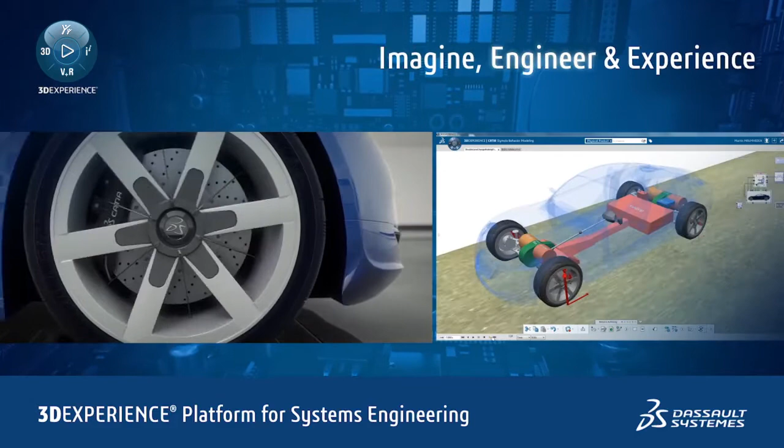The platform delivers an integrated, model-based systems engineering environment to imagine, engineer, and experience high-fidelity digital replicas that accurately predict the product or system's behavior through 3DEXPERIENCE, just like in real life. But why do we want to put 3DEXPERIENCE at the heart of the system development process?

Because in many industries, up to 80% of product innovations come from embedded systems. These systems can account for up to 20 to 40% of a product's development costs. And yet for more than 60% of the development time, no real prototypes exist. And even when they do exist, they are costly to produce and often incorrectly defined and are utilized in a suboptimum way.

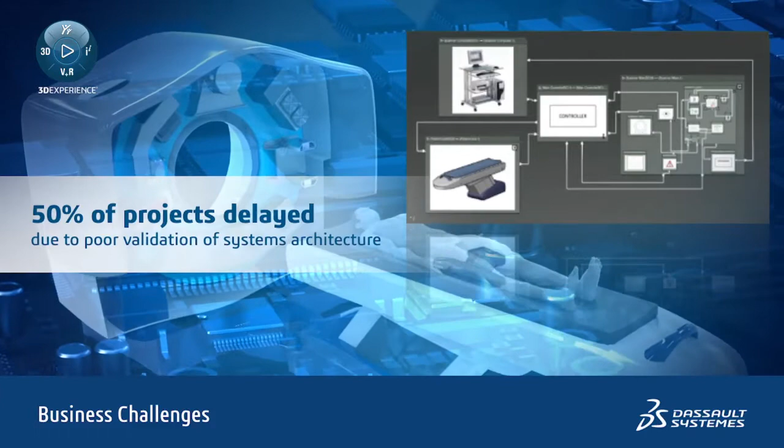Less than 10% of systems engineers typically get validation time with these prototypes, resulting in the late discovery of system errors. Errors that are often caused by systems architecture choices not being validated until late in the design process, resulting in system elements not behaving as expected when they are integrated with other systems in the overall product. This complexity, when coupled with the ever-increasing requirement to comply with stringent regulatory and industry standards, results in more than 50% of projects being delivered late or even failing altogether through poor management and traceability of system requirements.

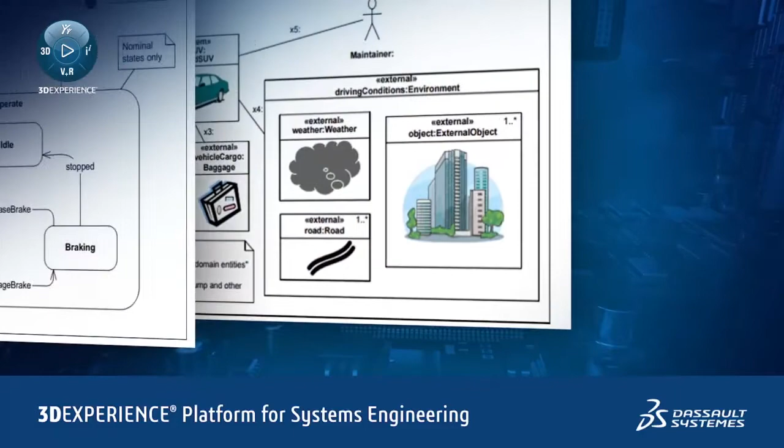These problems are caused by engineers using a multitude of disconnected systems engineering tools that can create thousands of different models of the system being developed, with each tool having its own view or model of the system. But these individual models are largely disconnected from each other as they are authored and managed by different legacy and proprietary tools. This makes it difficult to build a complete and consistent system view that integrates multiple engineering disciplines.

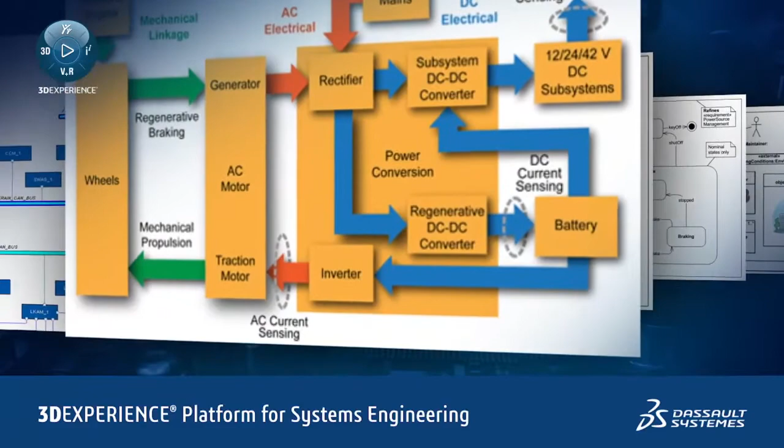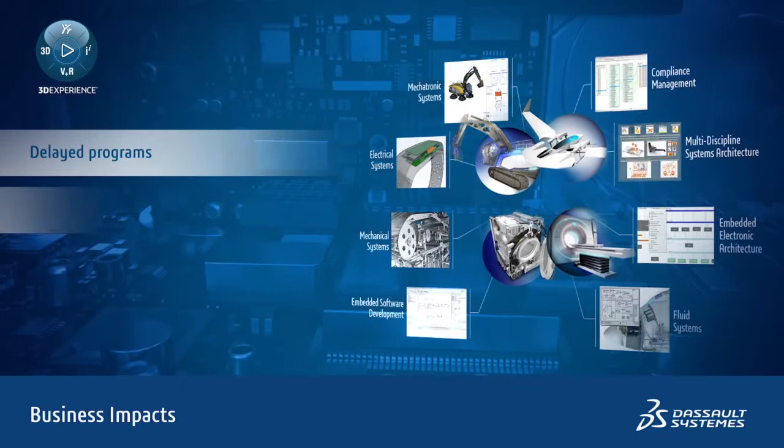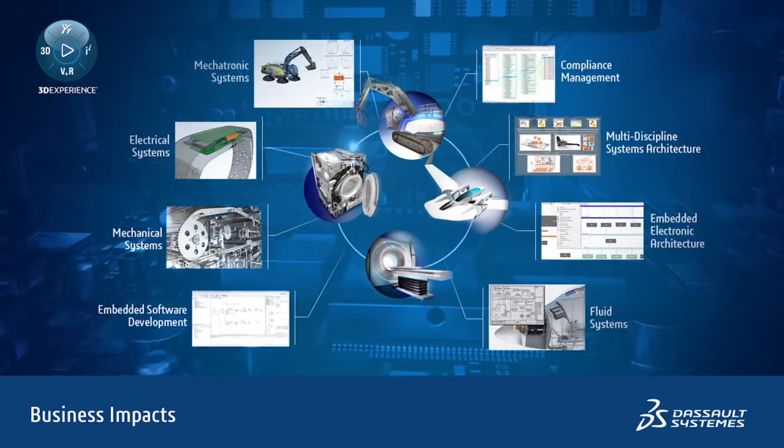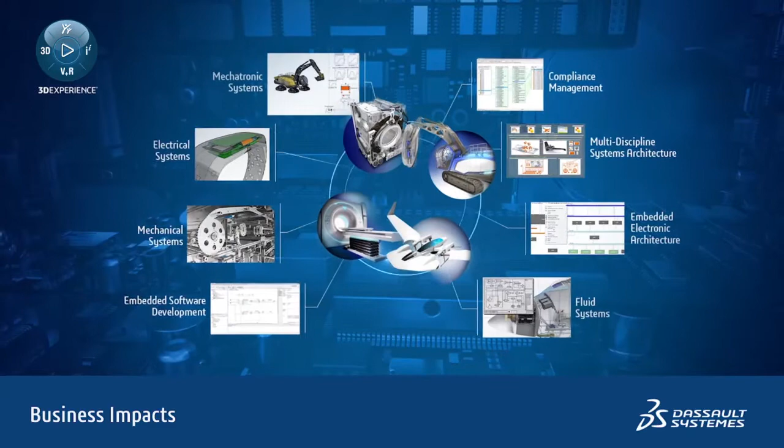It makes it extremely complex and costly to model and simulate the behavior of systems in the context of a complete product. The business impact of these issues is increasingly serious. Programs are delayed, products are poorly integrated with suboptimal system design, and engineering costs are inflated by unsynchronized and duplicated development effort. And it's getting worse. As product complexity and demands for variance increase, it becomes more difficult to master and optimize the development effort, often resulting in duplicated data. This data becomes difficult to manage across all programs, options, and variants.

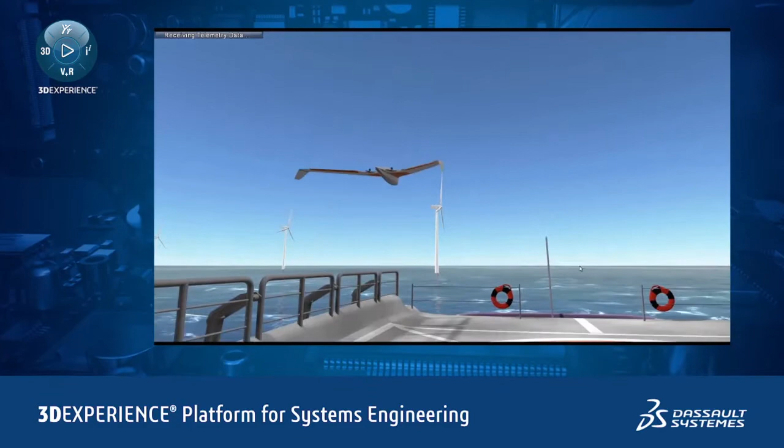What's needed to address these challenges is an integrated, model-based systems engineering environment that drives the creation and management of digital replicas of existing or future systems to accurately capture and predict their behavior. We create these 3D experiences by using an open development environment that brings all engineering disciplines together to collaborate, define, and share a common, consistent systems definition. A definition we use to model and simulate the behavior of systems in the context of a complete product and its environment, just like in real life.

Dassault Systèmes addresses these challenges with a collaborative and open 3D experience platform for model-based systems engineering. This platform enables users to design and experience the products and systems through a continuous engineering development process. Let's explore what we mean by 3D experience in the context of systems engineering.

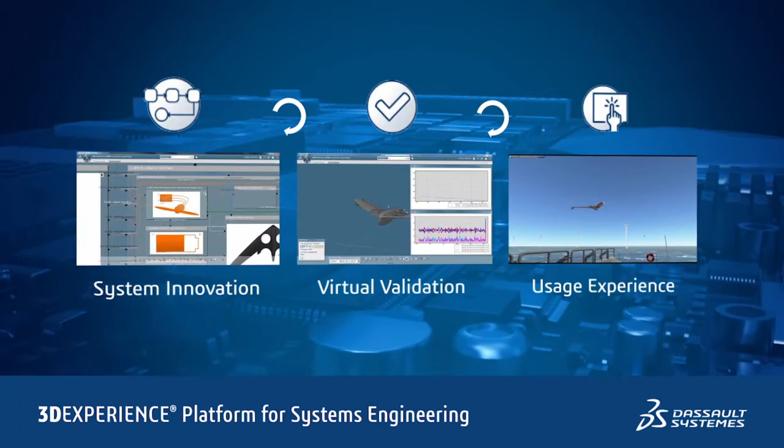We provide an end-to-end solution with digital continuity to design complex products and systems, starting from their planned usage through to the design and implementation, and optimize, verify, and validate these systems through virtual simulation at the conceptual design stage, reducing the need for physical prototypes. The closed-loop digital continuity between design and validation improves engineering productivity and delivers improved product quality.

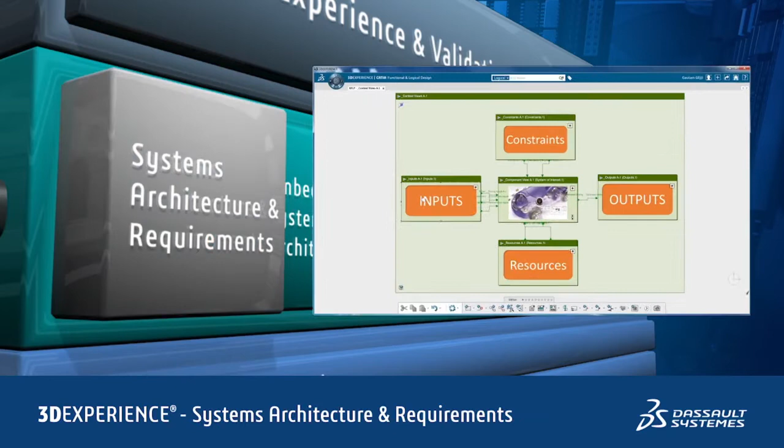This 3D experience platform is an open environment that can be used in conjunction with your existing tools and adapted to suit your processes. It comprises a set of integrated applications that covers systems architecture and requirements, to define and compose the system by considering multiple viewpoints through a set of integrated requirements and architectural models. Systems Embedded Architecture, to define, manage, and implement complete embedded architectures with electronic and electrical components and their interfaces.

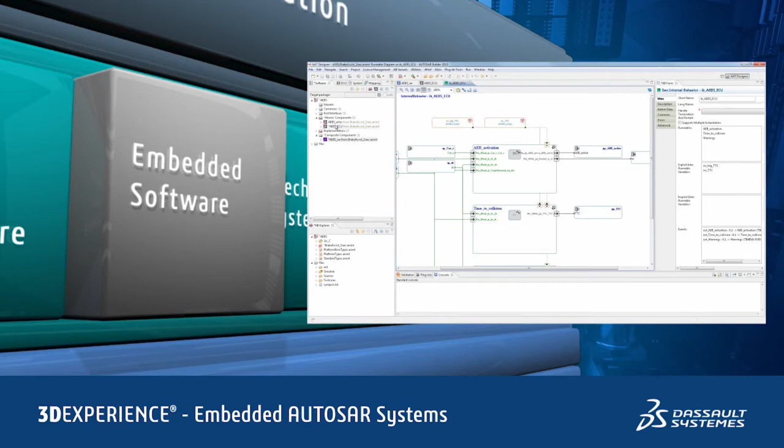Embedded software solution includes AUTOSAR Builder, a rich toolset for developing AUTOSAR-compliant embedded systems for the automotive and construction equipment industries. And Control Build, a rich solution that accelerates the design, development, and validation of control systems that comply with industry and regulatory standards such as EN 50128 and IEC 61131-3 for the train, railway, process energy, and plant automation industries.

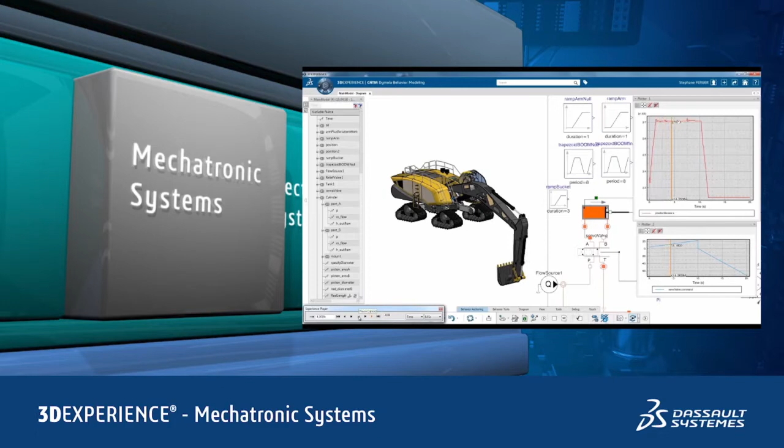Mechatronic systems behavior modeling using open standards, Modelica, and Functional Mockup Interface, where we simulate the system definition to predict and validate upfront the system behavior, just like in real life.

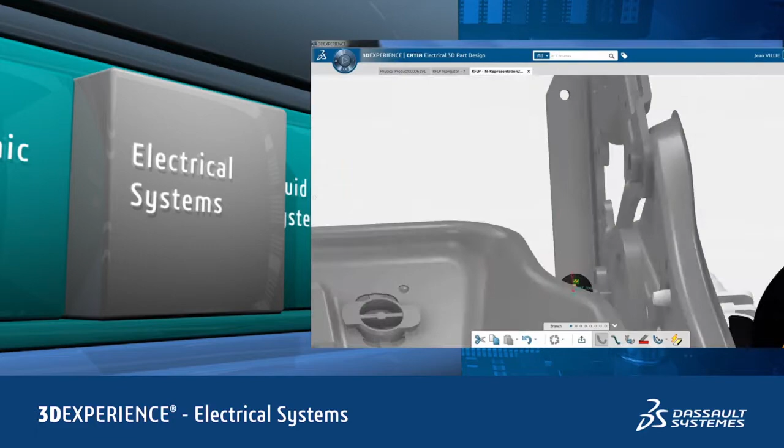Electrical systems, to define the wire harness and cable systems needed to provide the electrical interconnect between the different electrical components, system control units, sensors, and actuators within the product. Fluid systems, to define the tubing, piping, and ducting systems required to provide the necessary hydraulic, pneumatic, and fluid transfer capabilities needed by the product.

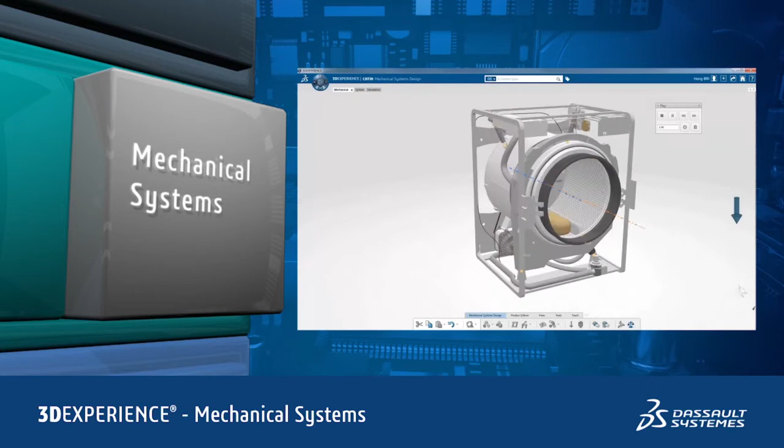And mechanical systems, to define and simulate the realistic motion of complex mechanical systems by considering the influence of kinematic mechanisms and the underlying forces caused by mass and gravity. We manage the creation and life cycle of all these system assets through a rich collaborative framework that supports the creation, sharing, and reuse of information.

The 3DEXPERIENCE platform accelerates time to value by delivering powerful, cross-discipline collaboration capabilities that span all stages of the system's definition, design, simulation, and validation processes through powerful services for social collaboration, dashboarding, visualization, and content management. It provides a scalable solution capable of supporting systems development from the smallest to the largest and most complex engineering projects.

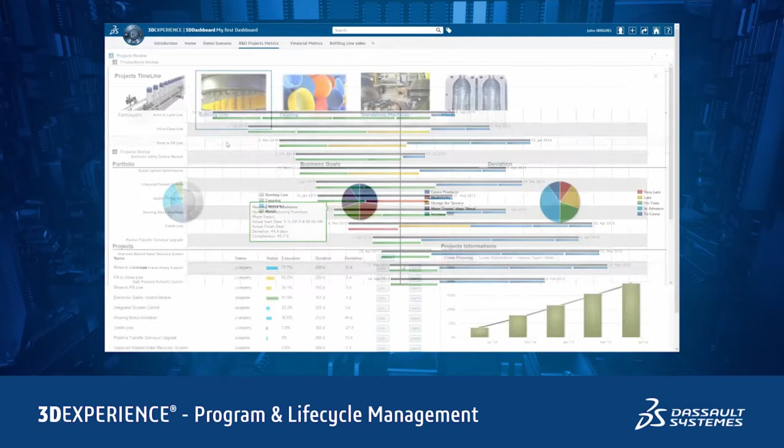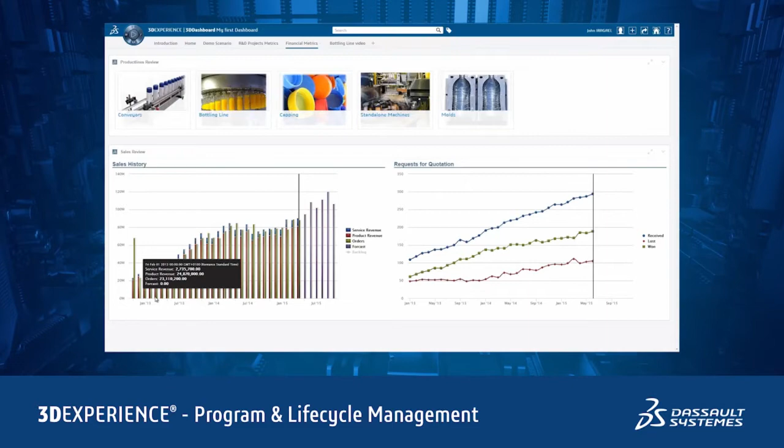Program and lifecycle management, with configuration and change management of all assets and management of product lines, and use powerful tools to manage and document compliance with industry and regulatory standards. It integrates program and earned value management directly within the systems design environment, with task status collection and budget allocation and usage becoming a natural part of the design process itself.

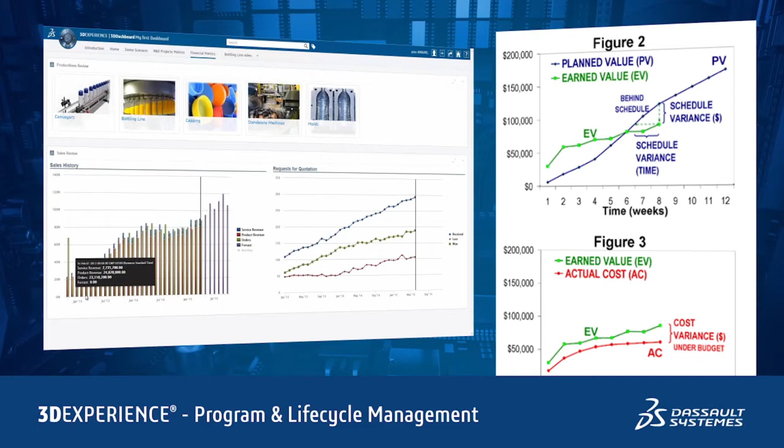By collecting information passively throughout the design process, it provides decision makers with real-time assessments and gives increased confidence in information. The platform provides full traceability of information relationships across all models with a unified change and configuration management process that enables early visibility of the impact of changes to all data consumers, including across the supply chain, all in the context of a configured systems definition.

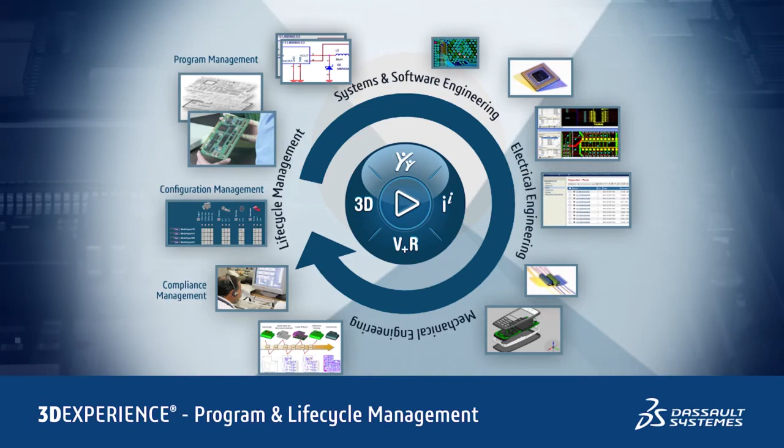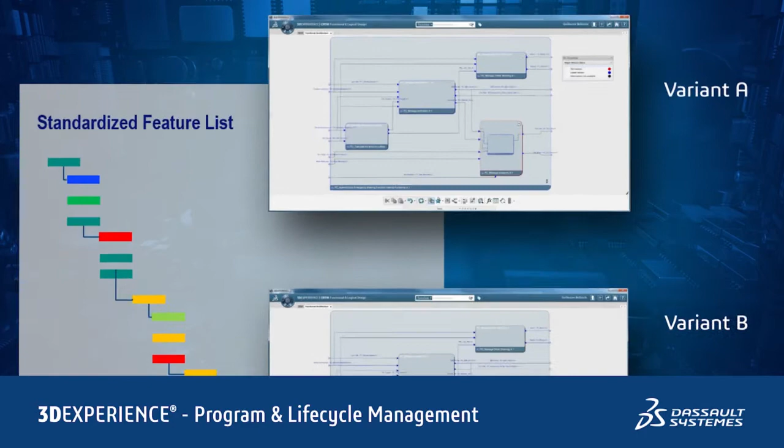Designing systems in a configured context means that we design the master system and all its variants simultaneously. We develop a single standardized platform for all product lines with functional and physical variants based on customer and market needs. By reducing the number of explicit system definitions, we reduce the number of definition assets, the duplication and number of tests, and increase system asset reuse across multiple product options and programs.

The 3DEXPERIENCE platform also helps you manage and demonstrate compliance with systems requirements and industry-specific standards and regulations, such as those demanded by FAA, FDA, or international standards organizations. Using powerful dashboarding, traceability, and analysis capabilities across more than 60 systems engineering tools, it's possible to assess the completeness of requirements coverage and impact of system changes across all engineering data at both the project and the program level.

What sets this solution apart is the fact that all applications within the 3DEXPERIENCE platform share an open and extensible common data model and repository to deliver a consistent view of information across all engineering disciplines and applications. The platform supports multiple open standards, including the Codex of PLM Openness, an initiative to establish the openness of IT systems in the context of PLM between customers, tool vendors, and service providers.

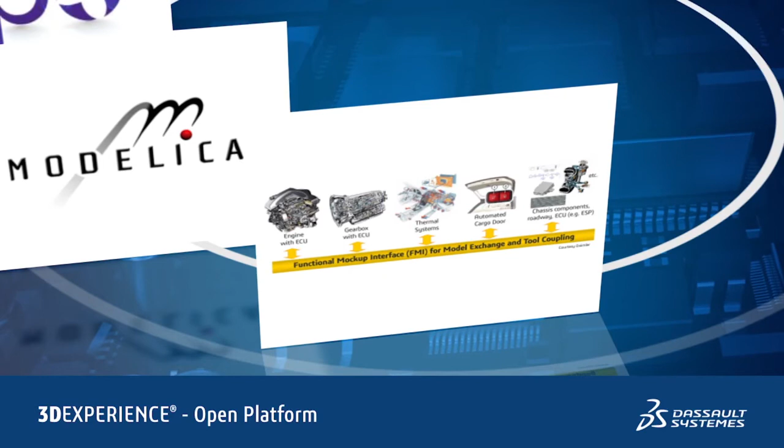Modelica, a standard open and object-oriented language for modeling and simulation of multi-domain physical systems. Functional Mockup Interface, a tool-independent standard to support both model exchange and co-simulation of dynamic systems models. AUTOSAR, an open and standardized automotive software architecture that enables the development and reuse of automotive software components. And finally, OSLC, Open Services for Lifecycle Collaboration, a set of specifications that enables integration of PLM, ALM, and IT software.

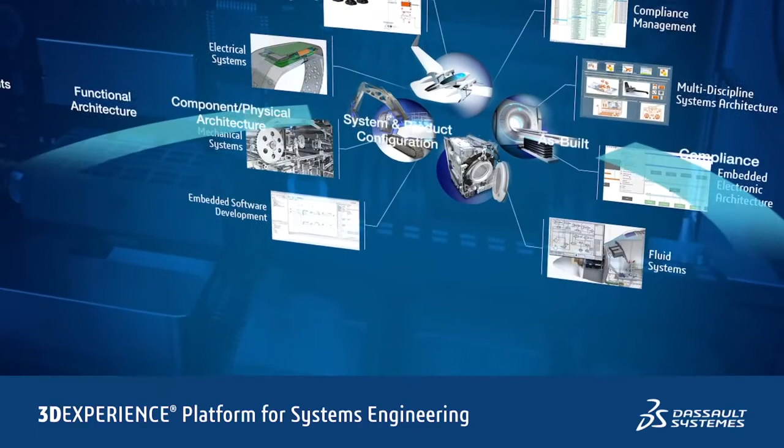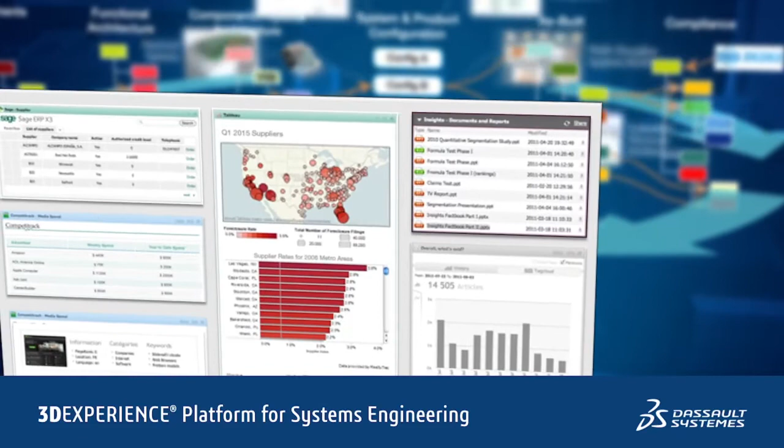The platform is built on an open and extendable common data model and repository that provides a single source of truth to ensure all stakeholders always work with the same systems definition, design, and simulation data. It protects your existing investment in tools and processes through standards-based integration and sharing of information across common systems engineering tools. In addition, it enables you to quickly and easily get real business intelligence from the huge volume of distributed and fragmented systems information through powerful big data monitoring, federation and analytic capabilities accessed through rich user-definable dashboards.

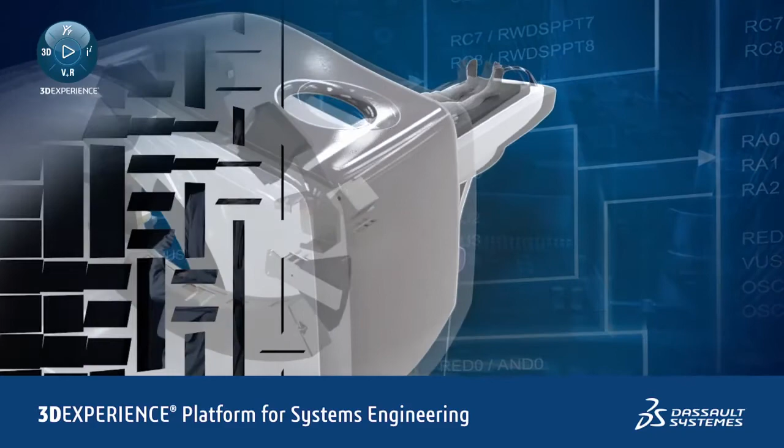So to summarize, the Dassault Systèmes solution delivers an open and powerful model-based system engineering development platform. It integrates all engineering disciplines through the definition of multiple system views in a continuous engineering environment that can be adapted to your specific systems engineering methodologies. An environment that can manage and analyze large amounts of data and enable the translation of this data into innovative system designs through collaboration with partners and suppliers that accelerate the development of validation systems through rich 3D experience and transform the way organizations define, model, simulate, and validate complex systems.